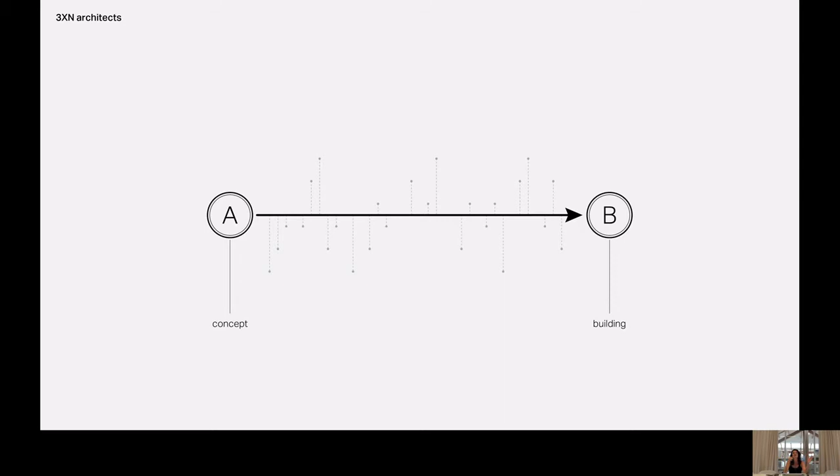I like this next set of slides because it says something about the different capacities and roles between 3XN and GXN. At 3XN Architects, essentially you start at A, you have a concept, you go through a process, and of course it's never exactly a straight line, but basically you end up at point B, the finished building. Hopefully A and B look pretty much the same. That's our aim, to keep it as clean and as faithful to the original idea as possible.

Whereas at GXN, it looks a little messier, a little more complicated. Essentially it's our role to test things, to explore, to mature ideas, maybe also to be disruptive in some ways. And we do this so that 3XN don't have to.

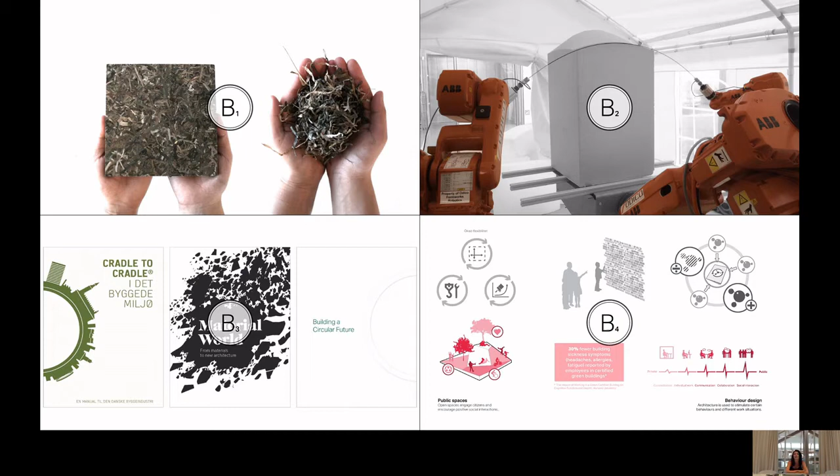In terms of output, it could be anything - we've worked on new materials, I'll come on to that too. It could be a new bit of code for robotics, it could be a book. We've published many books, which are all open source and available on our website. Or it could be design guidance, whether for a competition or later on in project development. So it's very varied.

Really, it's this synergistic, symbiotic relationship between the two of us. The research helps shape the practice, and then the research goes back and studies the results through post-occupancy evaluations, for example, learns new things, and so we keep feeding on. It's an evolving process, and it's really all about learning.

Within GXN, we have three key focus areas: behavioural design, circular design, and digital design. I'm not going to speak so much about digital design today - I'll talk about the other two. What's important to say here is that we see these as all essential components of sustainability. You'll see none of them say sustainability - it's because we've broken it down into constituent parts. I think often the real strength, the real juicy, interesting stuff, is in the overlaps between these different domains.

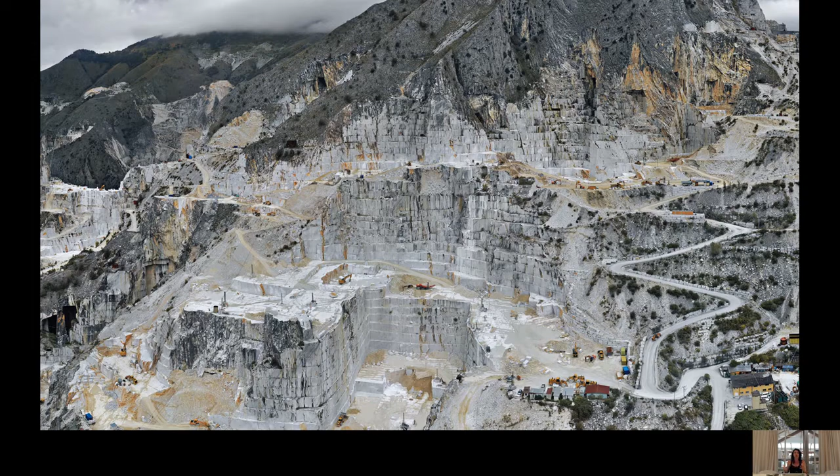So I'm going to start now on this first half, which is about circular design. Now, why are we doing this? We're really motivated by the impact of the built environment on the natural environment, the huge amounts of resources, the impact on nature and the landscape, and the need to conserve resources and be smart about that. These images kind of say it all.

I'm going to do something a little different. Usually I would just talk through various projects, but because this is about the city, I wanted to talk a little about scaling up knowledge - from the component to the city. So I'm going to start by showing you something at city scale, as more recent work, and then go back and show you how a few other smaller scale projects have fed into this and allowed for scalability.

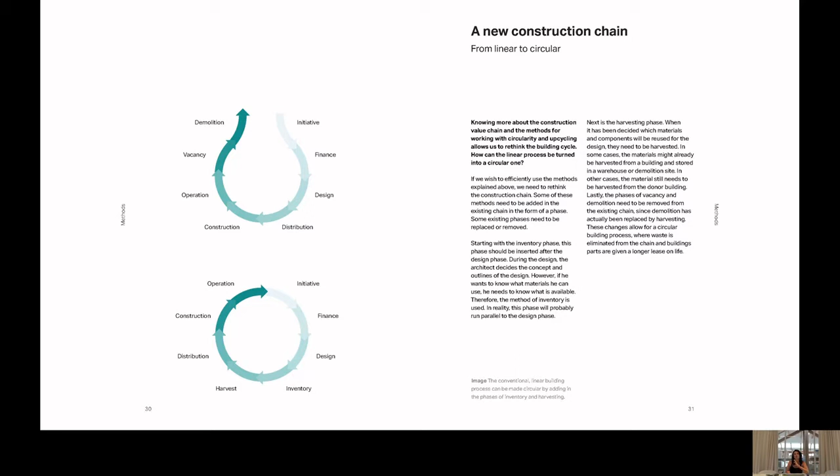So there was some sort of general literature review and understanding of this. And then we became as local and regional as possible. So who are the stakeholders here? How can we engage with them?

Things like at the beginning of a construction project, it's not traditional to get a demolition expert involved at all, but we understand that does become critical in circularity. So understanding, mapping out stakeholders, who needs to know what and when.

And then the students did a fantastic job of going out in the area. This is an area tagged for a huge redevelopment transformation. There were already buildings marked with green that are going to be demolished, and other buildings that are new and others that are retained.

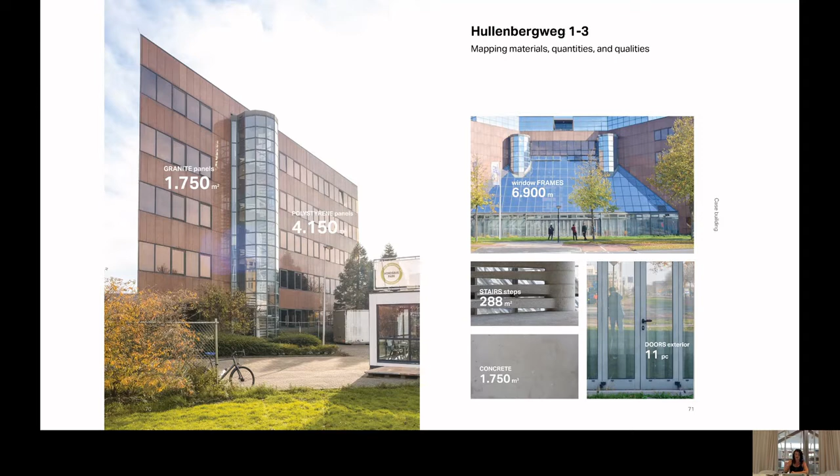So they went out looking at all the buildings that were to be torn down, to be demolished, and mapped and calculated the quantities and qualities of the materials available. This is a big exercise, I should say.

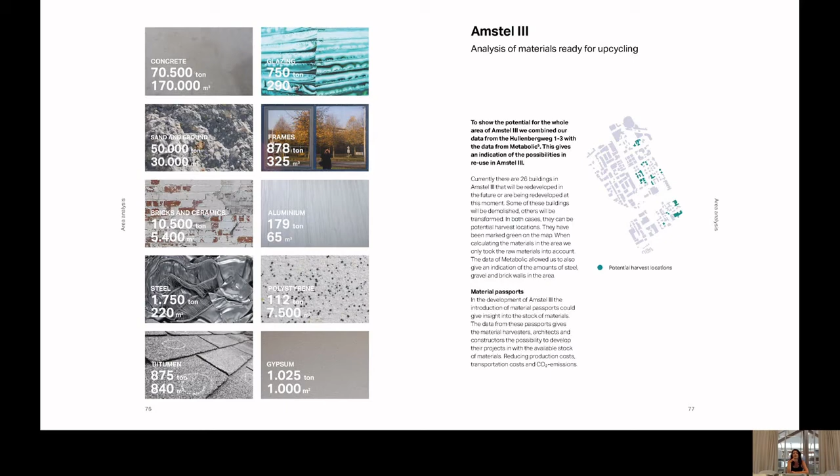This gives us a kind of palette that we can work with for the new buildings. You can see on this map the potential harvest locations and what we think we can get from these. We then carried out an analysis of what that means in terms of energy, and calculated that we could have 28% embodied energy savings through upcycling, so we can feed this material back into the new buildings.

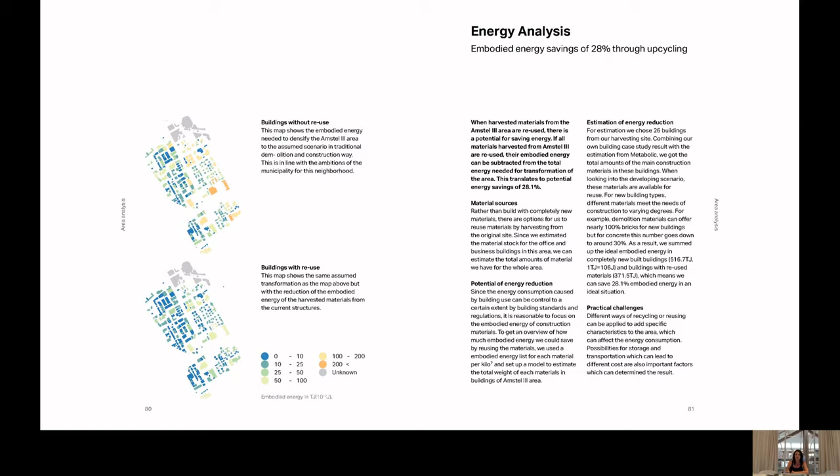So that was the preparatory exercise. And then we made the second book, Upcycle Amstel, about tools. This, if you like, is what the city wanted from us: how could we formalise a process, a method for ensuring circularity?

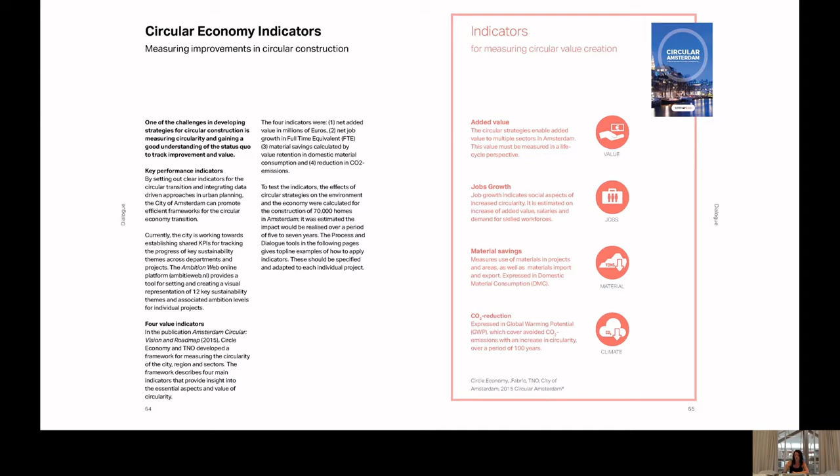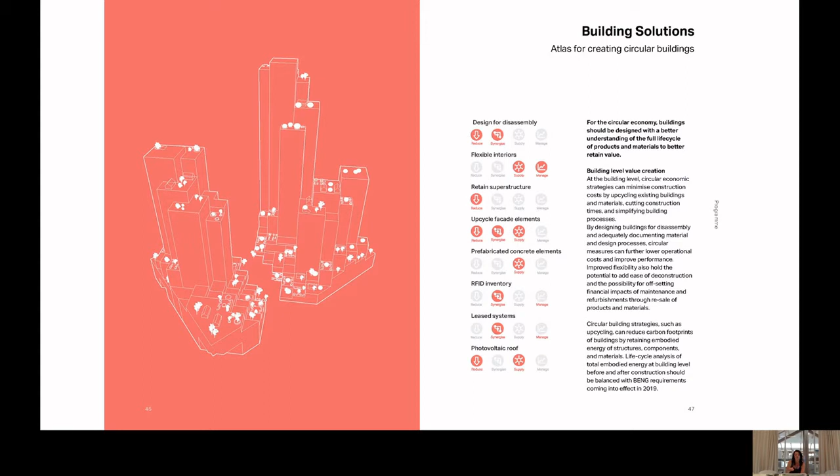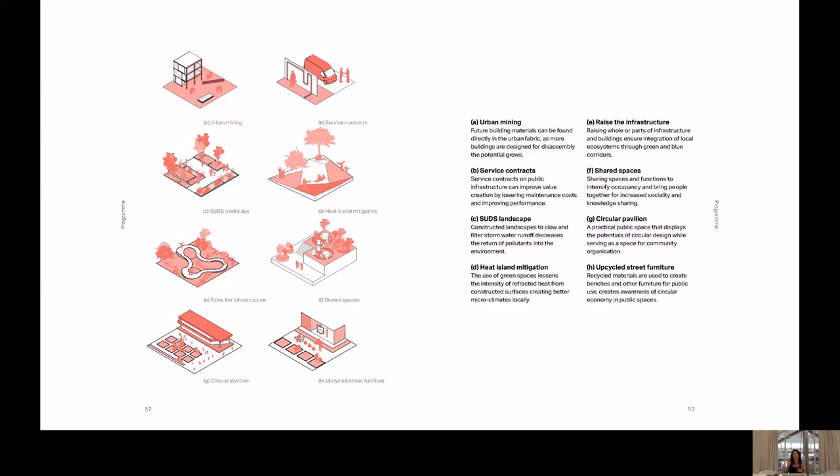And then we spatialized them in a diagrammatic, open-ended, non-deterministic way. We always find this communication aspect of the work really important, so people can begin to understand what it might mean, what it might feel like. It's not to be underestimated, that spatializing.

Then we looked at dialogue tools. Both this slide, and in general looking at the whole process, is about saying who needs to talk when, what decisions need to be made when. So almost like you would with a RIBA Plan of Work, plot onto that in terms of circularity the key milestones. Okay, so that was a more recent project, very much at a city scale, a very high level, and all about a sort of how-to manual.

But we have some form for other how-to manuals in the field of circularity in previous years. I'm going to quickly go through these. So Cradle to Cradle was one of the first that we did, and this was about taking Cradle to Cradle principles and reinterpreting them, tailoring them to both the construction industry and more specifically the Danish construction industry.

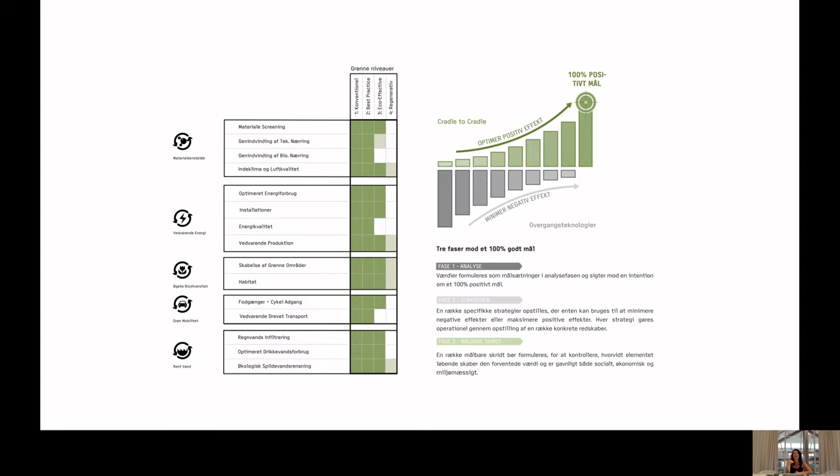And this book, again, was also very pragmatic, was also a sort of how-to manual, if you like. So we split it into different areas - I realise a lot of this is in Danish, but apologies for that. It could be about biodiversity, we had a chapter on energy, a chapter on water, and so forth, really laying out in each of those what you do at each phase, what are the strategies, and how can you measure this.

What we learned from that book, we also put into practice through projects which become case studies as well in the framework of research.

Some of the cradle principles, as you might know already, but the idea is you want to separate biological materials and technical materials. When they get mixed together, you might call them Frankenstein materials. They're very different, they're impossible to recycle, let alone upcycle. So you want to keep these separate.

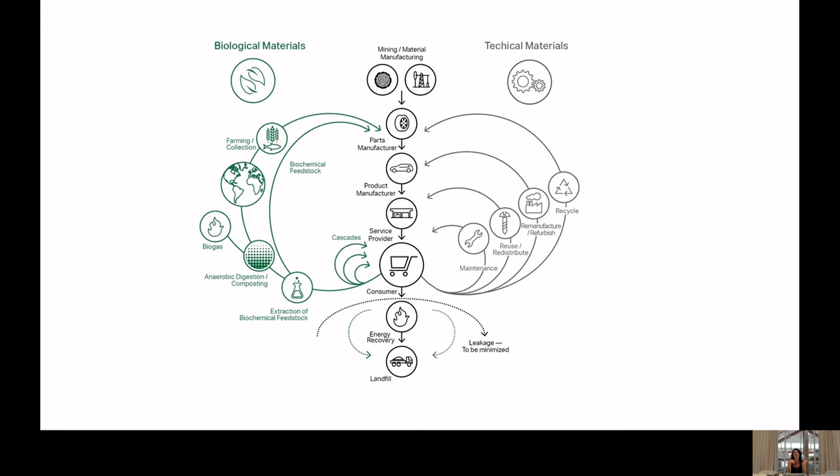So this project then all became about biological materials. How could those be transformed into building components? So there's the tomato stems, the raw product, and then we also looked at other materials, for example seaweed, and then looked at how these could be processed and turned into panel or sheet materials. Many of them have really beautiful textural qualities as well, and this could be an alternative to, for example, gypsum plasterboard.

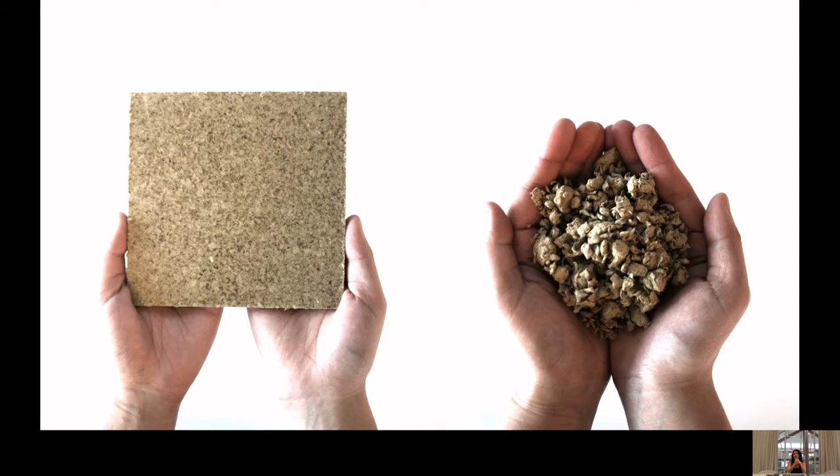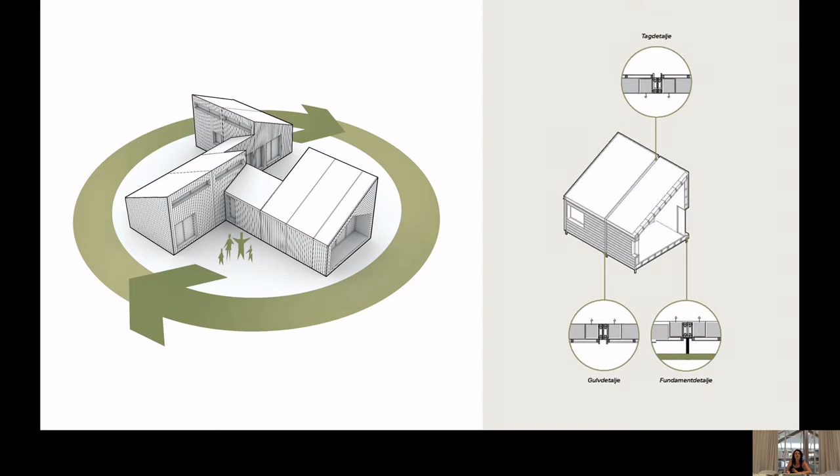You know, it's not just about the components themselves, but what about on a systemic level if we're talking about housing? This was really one of our first forays into design for disassembly, because we studied how the housing itself could be very modular, and therefore could be like a kit of parts that could be put together in different ways to create different sorts of housing for different and changing family types. I think it was this, so that was a sort of scaling up from the material or component, starting looking at system.

So with this next book, Building a Circular Future, we took that further.

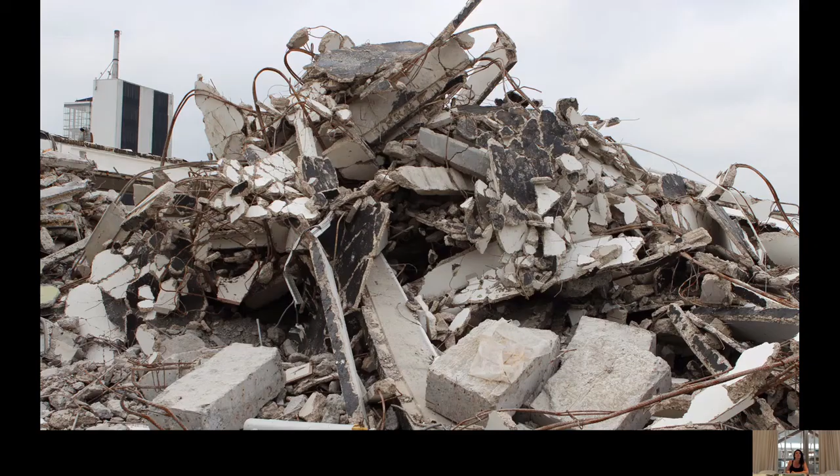89% is the percentage of construction material that is currently recycled in Denmark, I think anyway, which sounds fantastic and is great. The problem is, though, that this is what it looks like. So even though 89% is recycled, only 2% of the original value is retained. This is clearly problematic economically, also as an incentive for sustainability. So we set out to really examine this idea that it's about value, not volume. In other words, it's about upcycling rather than recycling or even downcycling.

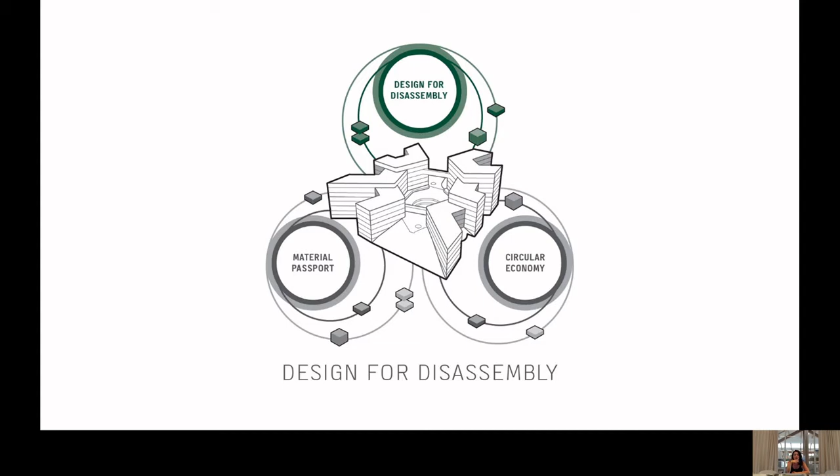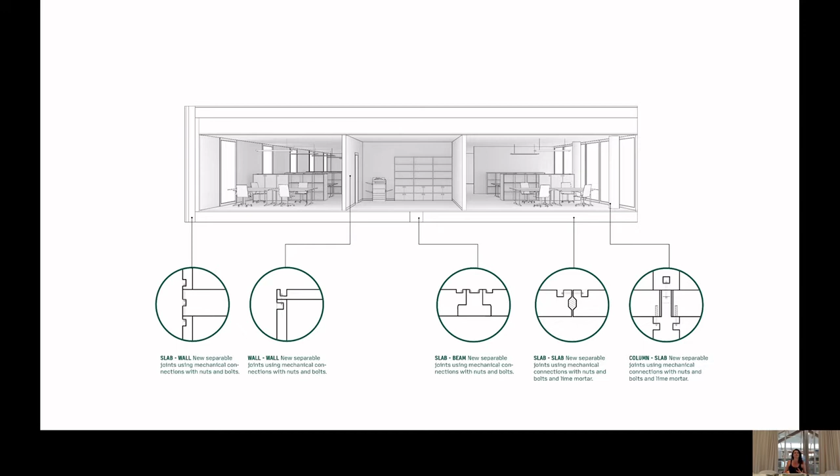So we then analysed all the different sort of typical intersections - slab to beam, slab to slab, column to slab, etc. - within a typical building, and collaborated. I should say here actually that basically all of our projects are collaborative, we always work with partners. So in this, for example, we have a long-term relationship with Peikko, manufacturer of concrete and steel, to develop these mechanical reversible fixings. You can see here, these are embedded very neatly into the prefab concrete slabs or walls, whatever it might be, so that these at the end of their life can be cleanly and easily taken away and reduce wet trades, which also, by the way, helps with program.

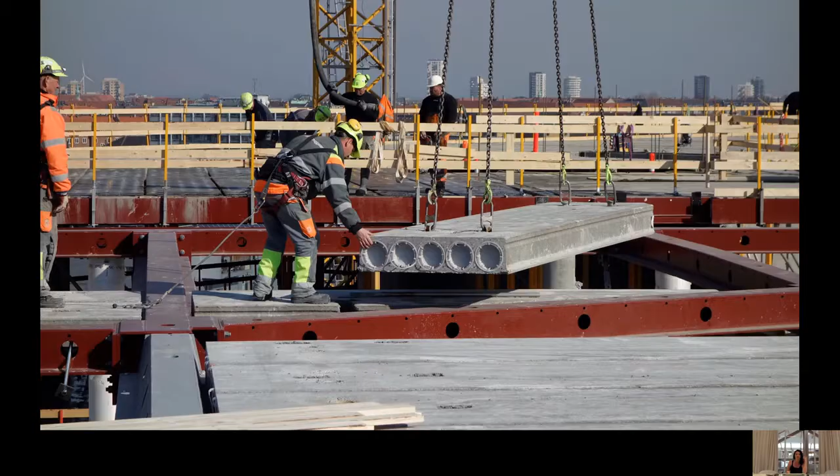I suppose the idea here is that if you were to walk onto a building site and see this site, you wouldn't know if this was construction or demounting. You can't tell if it's at the beginning or the end of life, which is true of circularity. So that's a collaboration very much there with a manufacturer.

So how can we put these principles into practice? I've got a project here to show you called Circle House. Now this is a huge project. I could talk just about this for the whole lecture, but in a quick way, this is hugely collaborative.

The idea with the Circle House is to revolutionize Danish, what you might call social housing - low cost housing made for everybody. The goal is to create housing which costs just the same to build and to buy or to rent as traditional, so that the circularity, apart from the original design and research cost, it costs the same in practice.

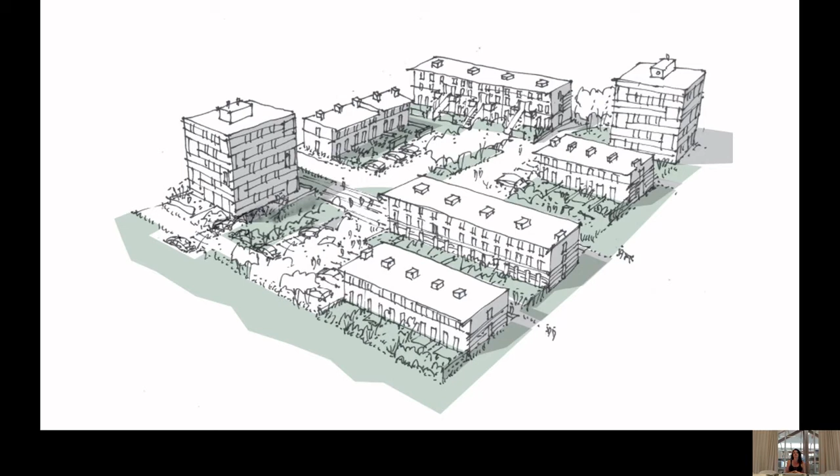And so with this, we're looking at circularity and design for disassembly at all levels from the building, from foundation up through beams, slabs, walls, and so on - so the whole thing can be taken apart in the future.

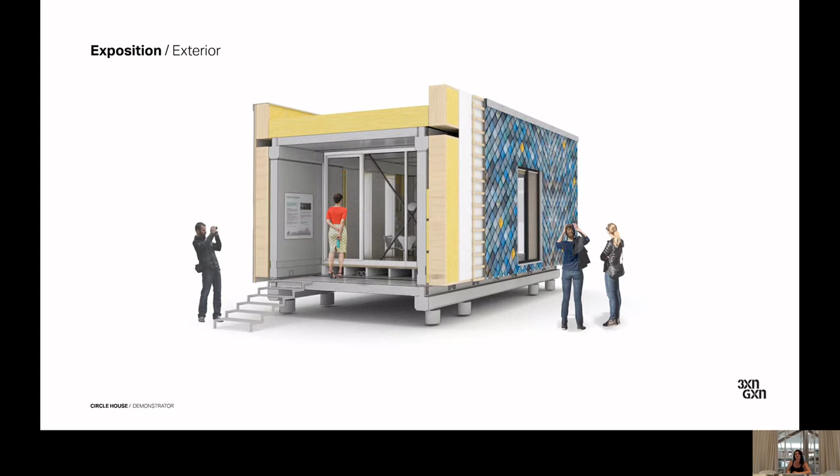So one of the things that we did there was to build a demonstrator. The idea with this was, of course, to test out some of these ideas in a technical way, but also very much to promote the idea. It's not only about the technicalities of construction, it's also about the aesthetics of upcycling, the aesthetics of disassembly.

For example, the furniture is also upcycled. You can see the different sorts of insulation, which come from natural materials, and so on. This is sitting in Copenhagen, I should say.

You can see on the left there, it's quite pedagogical as well, about explaining the different layers of the building and their expected differing life cycles, how it could be taken apart.

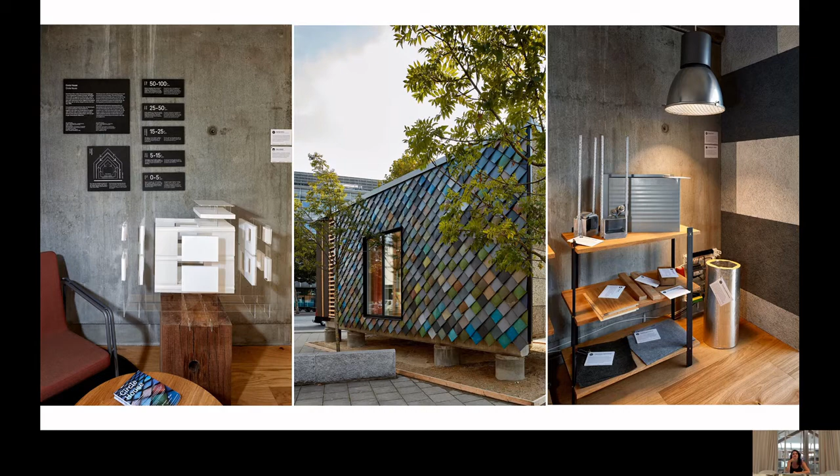So the final one in this circularity section, we take particularly the notion of design for disassembly further and apply it to a different scale, different typology, to ask what if an office tower could keep evolving. And this is important, it's a changing market with changing tenants in many of these spaces. So how can circularity also start to add value to the users of the building?

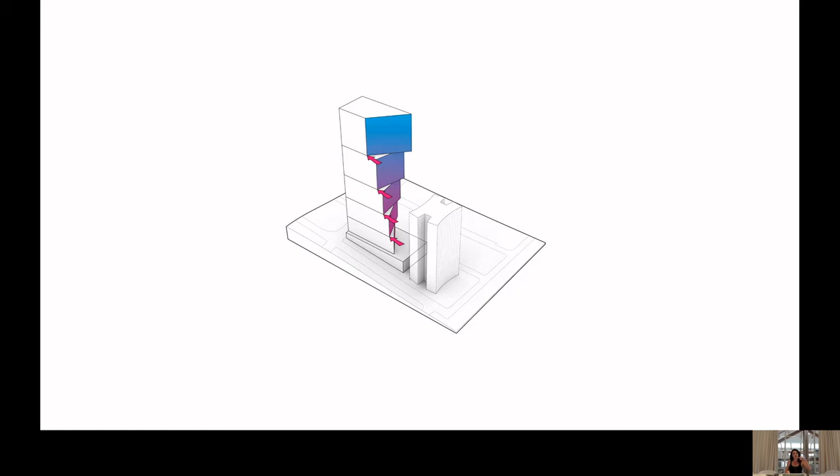We also then broke down the volume, so it's not just an extruded mass. This is because the idea of human scale, a human scale tower, was really important to us. So sort of taking this idea of the city scale, but then stacking it, sort of carpet city if you like, and then stacking that up into the tower.

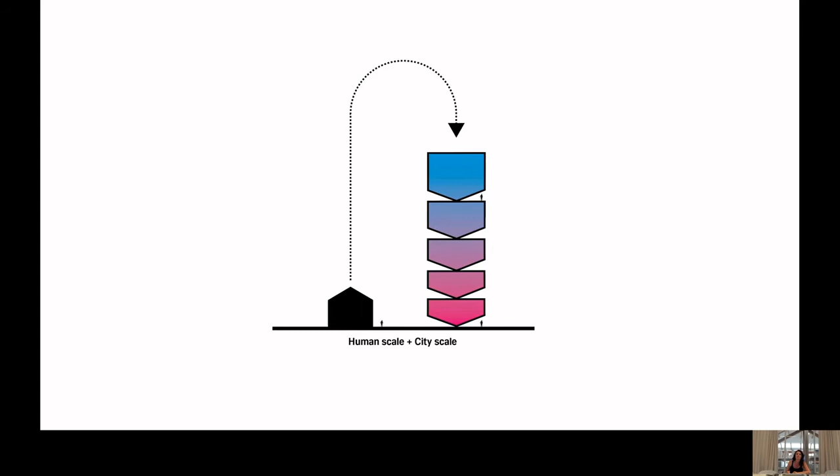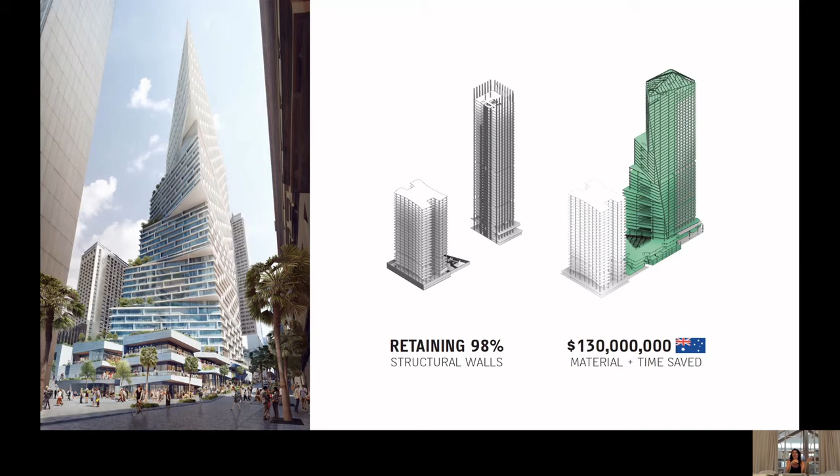So I mentioned before, it's actually a refurbishment. You can see on the left diagram there, we retained 98% of the structural walls. And then we added in the green this kind of overcoat on top of that to increase the floor area and also transform it aesthetically. We calculated that this would save 130 million Australian dollars, both in material and in time saved programmatically on site.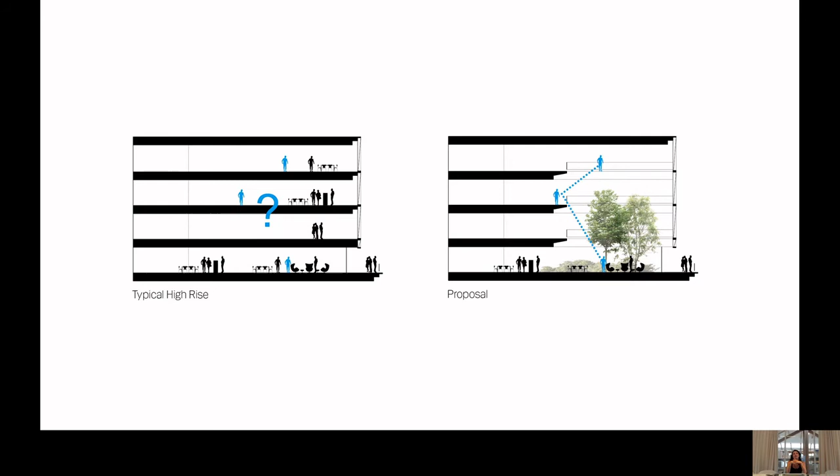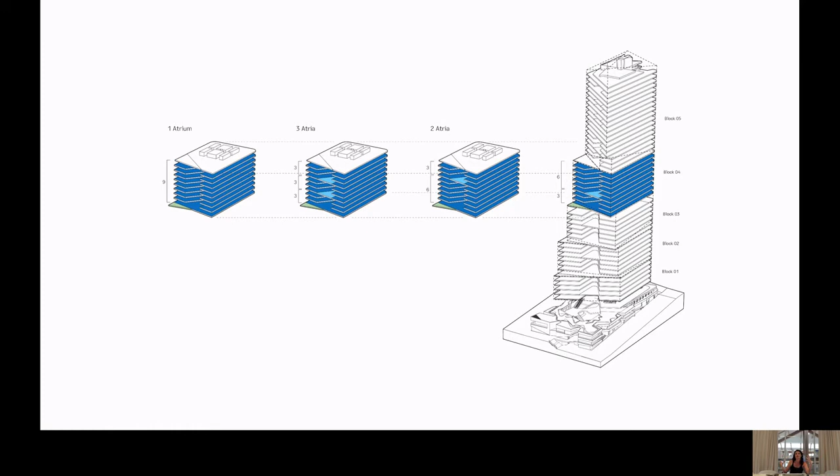So the design for disassembly component was born out of this idea. It's a speculative office development. We don't know how many tenants there are going to be and what their wishes are. Usually we'd be proposing, on the right-hand side there, some fantastic triple height spaces and atrium, but maybe some tenants don't want that. So how could we afford that flexibility? So that one can choose when you move in — if you're a tenant, yes, I want a 2-story high atrium, or we've grown and desperately need more floor space, let's fill it back in again.

So what we looked at was taking out this little U-shaped cut at the front of the building, and using design for disassembly principles — reversible joints, no wet trades, and so on — in order to make this piece removable, as a soft spot effectively.

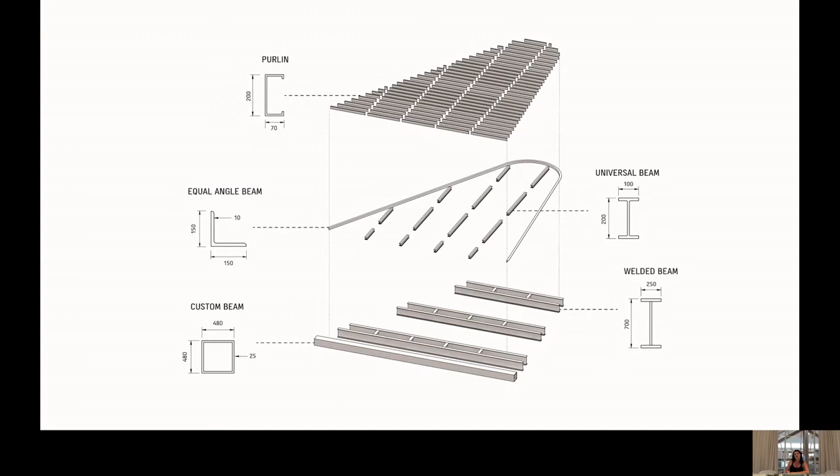A couple of things here: we use completely standard steel sections, nothing bespoke. They're spliced together, mechanically affixed rather than welded, and most importantly, they're sized in a way that fits in the goods lift in the building. This is important so that if a new atrium is added or taken away, the building doesn't have to shut down. We don't have to close parts of the building — it can keep on working and living while this happens.

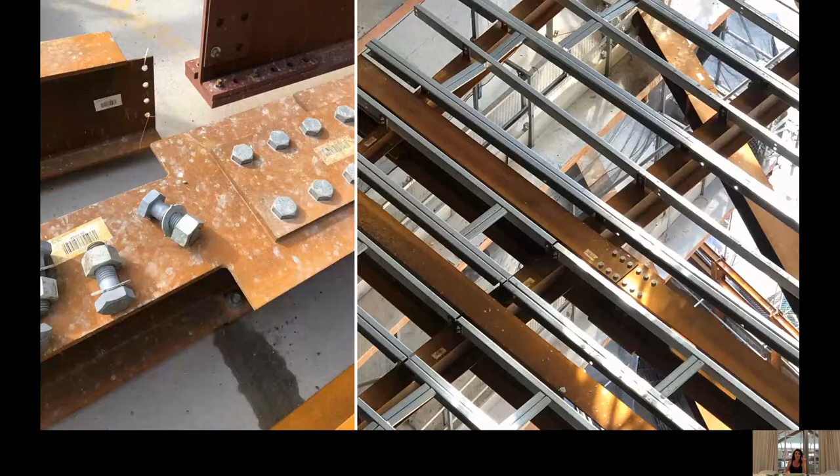And this is actually on site now, this is the very building I was just talking about. We really believe in the power of these spaces in workplace design, in schools and anywhere, and the power of design in terms of well-being. So this is kind of the pivot point, if you like, between circularity and behavioural design — one of those overlaps I mentioned at the beginning, in the Venn diagram of those two fields. So I'm now going to shift into behavioural design.

I think I'm okay for time — just checking. So behavioural design is a newer focus area for us.

This is 3XN's tagline, architecture shapes behaviour. They've been working with that for as long as 3XN have existed. But as the years have gone by, they've really sharpened up that focus and articulated it even more. It's a very Scandinavian idea, I suppose. But at GXN, we flipped that 180 degrees to say that behaviour shapes architecture, or at least it absolutely should and ought to.

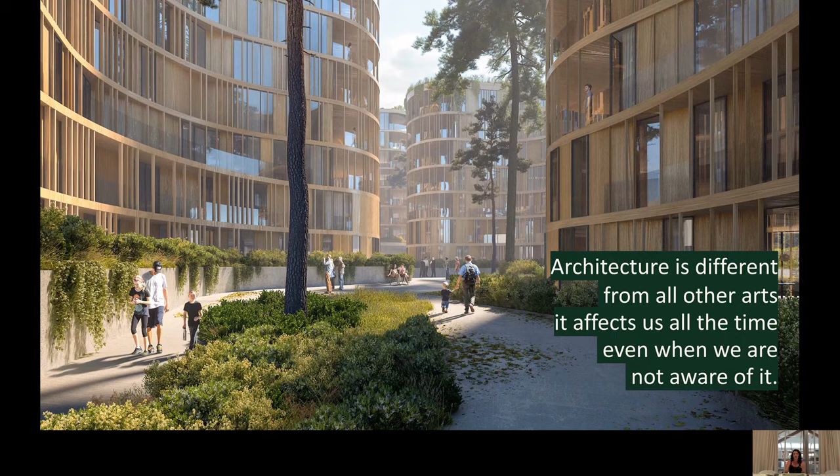I want to speak a little about why behaviour, why behavioural design, is important. One thing we often say is that whether you're aware of it or not, whether you're conscious of it, the built environment is always affecting you — affecting your physical, mental, and emotional health. So if you're a designer, an architect, whether you acknowledge it or not, you are a behavioural designer. We just try to be explicit and conscious of it.

There are some amazing facts out there. The social sciences have traditionally been harder to quantify, but across various disciplines, amazing research is coming out these years. For example, research says that your face-to-face relationships — your weak social relationships, not with family or friends, but your community — are the number one indicator of longevity, even more than alcohol or exercise. Homes set in a really lush green courtyard report drastically reduced amounts of crime, including domestic violence. And daylight, something architects are always keen to work with, markedly increases sales profits in retail units, even more than energy savings can do.

So again, I mentioned the economy, which you'll notice I do quite a lot. It's because we really have this holistic approach to sustainability, where you've got the environmental, ecological, of course the social, and also the economical.

So I guess what I'm trying to say here is that behavioural design is essential to sustainable design. And that's because we believe that if people don't feel good in places, if people don't want to stay there, if they don't want to look after them, if they don't grow to treasure them in terms of their identity and sense of place, they're not truly sustainable.

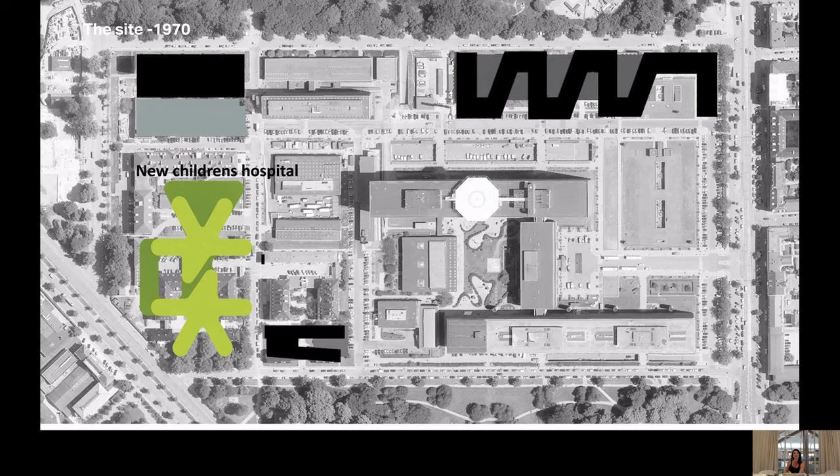And I want to show you how some of these have come to life in our children's hospital here in Copenhagen. This is the site, and we've done a few other projects there shown in black for the hospital, which is the biggest in Denmark, I think. But this particular project is the children's hospital.

Good, no music, I'm glad about that. So here's some of the basic design concepts. It was conceived of as 2 hands because there were quite different functionalities to house, with some overlap between them, but they needed separation.

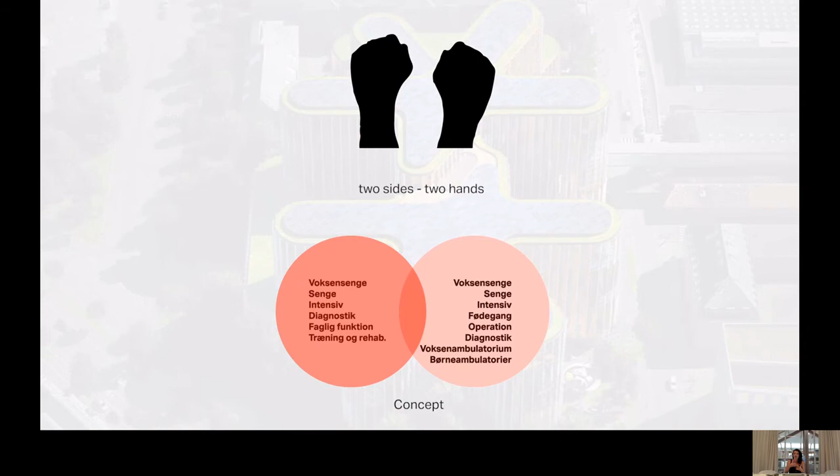And then imagining extending these hands out to create these fingers with terraces at the end of all of them. I'll talk more about why as we go through here.

So this is a children's hospital. It's a really vulnerable group of not just the children, but their families. And we felt it's so important to design for their well-being.

So we had these 5 principles that really are the foundation that the design was built upon: integrated play, designed for everyday life, see me ask me let me, the good journey, and clear zones. I'm going to go through each of these, how they relate to wellness, but more specifically how they were

translated into design ideas. Starting with play, first of all, this bit here was in collaboration with Rosan Bosch, other architects here in Denmark. We looked together into different benchmarks, different types of play and why it's important - for example, the emotional side or the cognitive or the physical. And then you can see these icons in the middle, created as a palette of what we needed to cover.

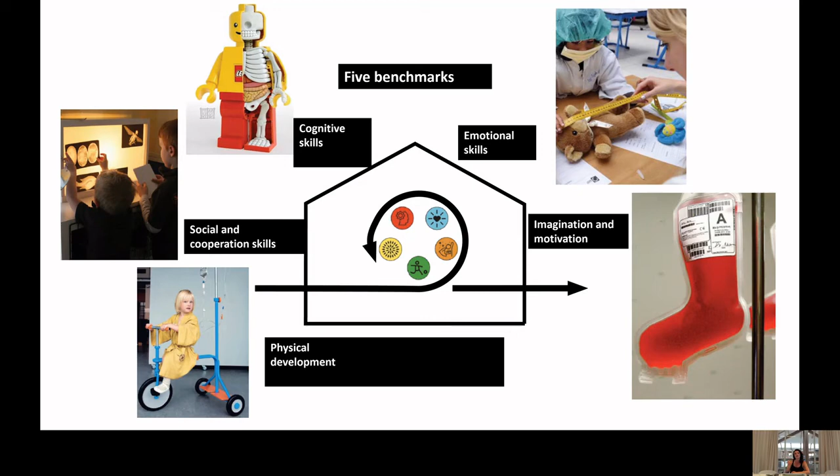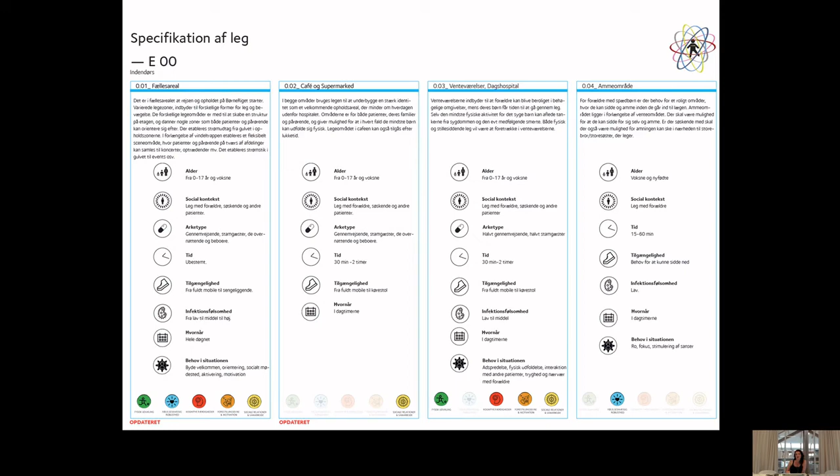Once we had the specification, we then made it spatial - looking at, for example, in the entrance areas, how that might differ to something which is deeper into more private areas, different sorts of play that are relevant there.

Design for everyday life was this very simple idea of domesticating the hospital. There's children here that are here for really long periods of time, and their family are staying with them or sometimes coming and going. So how could we design the hospital as home? By doing that, we really took this idea of a classic house and how it has different levels of privacy - as you move deeper in, you kind of get the heart of the house, which is very social, and then more private areas and buffer zones and so on.

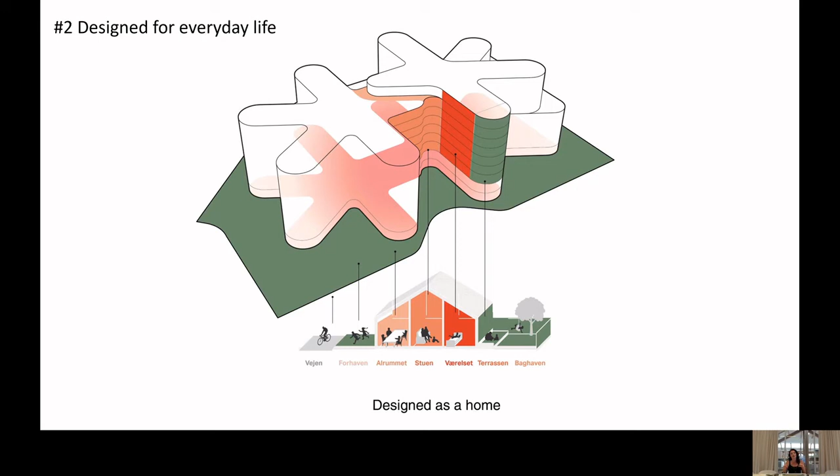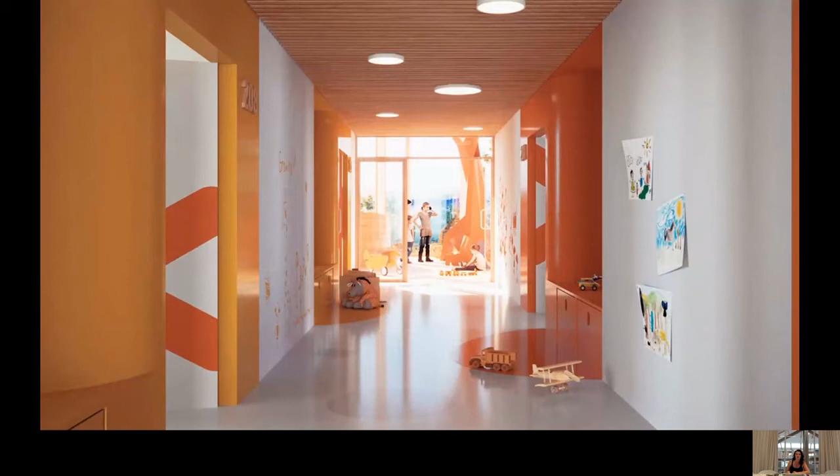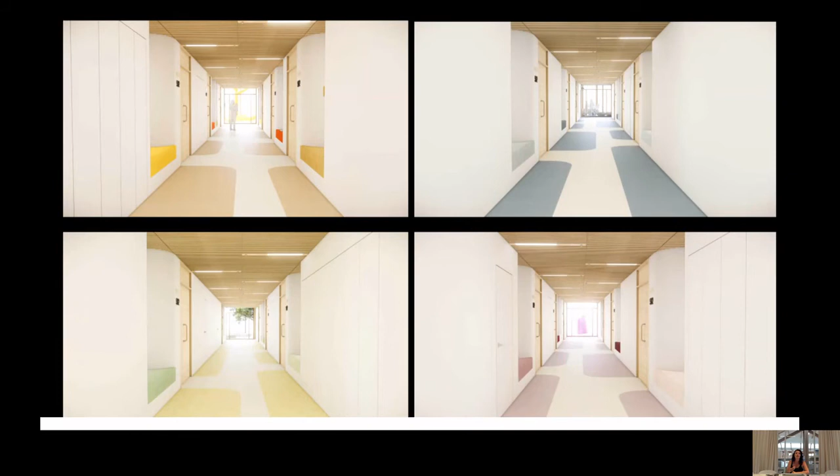We also then looked at things like color. Now, this is not what it looks like, because this was an early idea, and I think we started thinking bright, cheerful colors. But then we looked more into color theory and actually the importance of colors which soothe, which are gentle. We believed that to be really critical, so the color palette as well was part of the design.

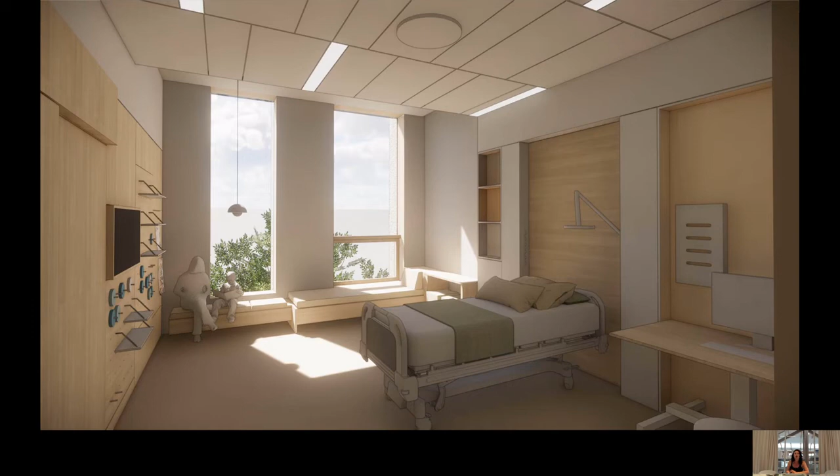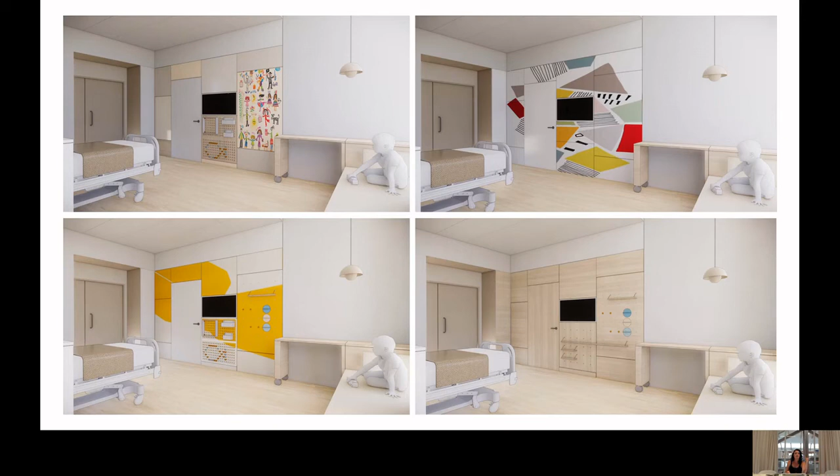In the rooms themselves, of course, ample daylight, views, different sorts of surfaces for sitting or lying and so on. Also the materiality here, we've got a natural material in these walls, and they're customizable. The idea is that children can have some influence on their room, just as you would at home - put drawings up or whatever - so they could have options over what sort of style they want, so that they felt they had some control back in their life, as well as creating a more domestic style atmosphere.

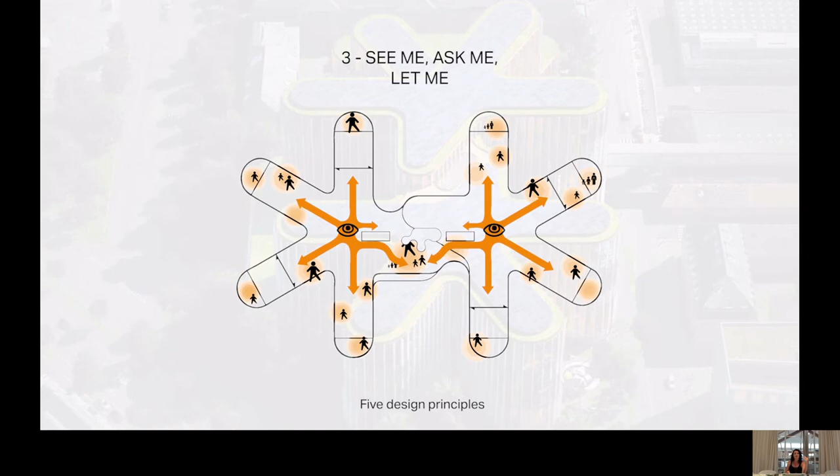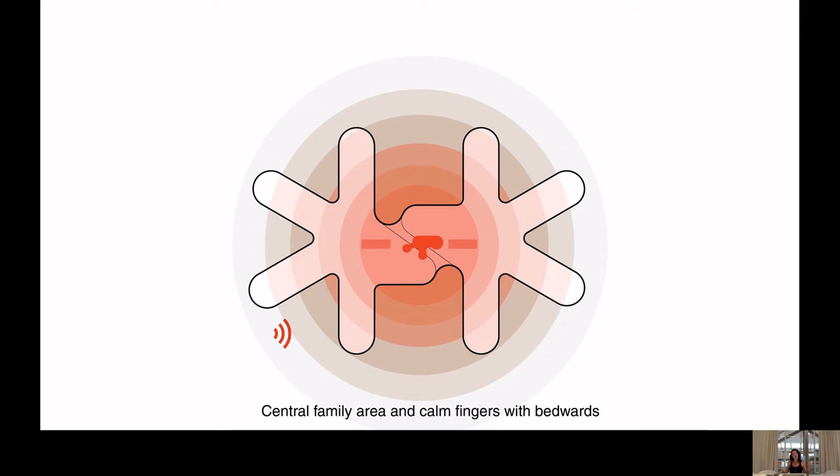See me, ask me, let me. Here, at the eyes that you see, this is where the nursing stations are. The idea is that everyone is equidistant from these nursing stations, so everything is easily accessible. This also helps with noise, with acoustics - so that in the middle it's more like the living room, it's noisier, it's social, you can go there. And as you move further out along these fingers, it becomes more quiet and calm and private.

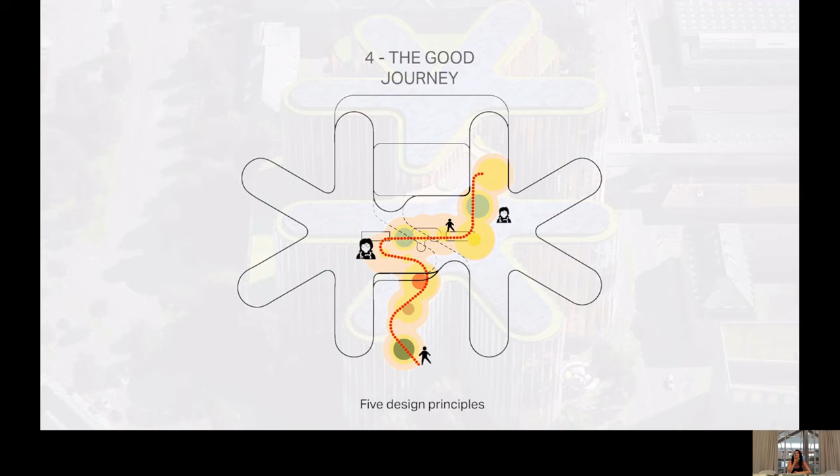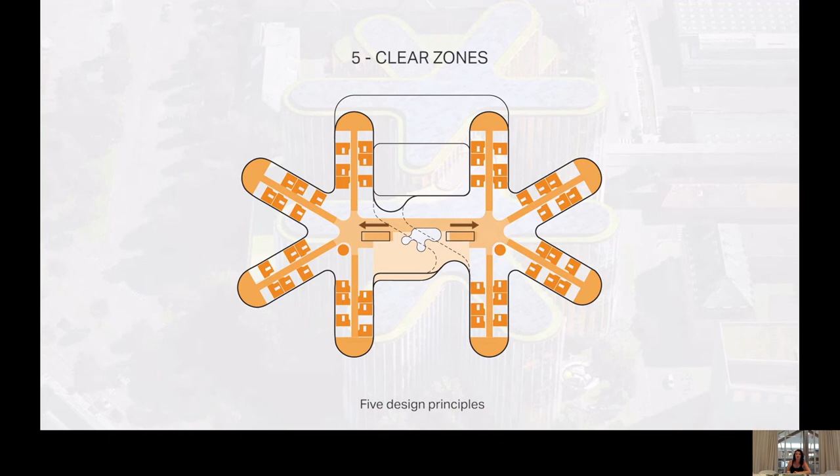The good journey, I think what's most important here is that because of these fingers, this cul-de-sac design, so often in hospitals you can feel like your bed's in a bit of a corridor with constant traffic through, people and things going back and forth. But here with these cul-de-sacs, it means it feels more private. So you have this journey from the approach of the building up through the more social spaces, but then only the people living or working in each of these fingers is there. It's not a corridor, it's not circulation. And then finally, very simply, clear zones, just the clarity of where things are and how to find your way back. Hospitals can often feel like mazes as well.

So here's a plan. This project's on site, I should say. But you can see here at the end of each of the fingers, there's a kind of fingernail, which is a terrace or a garden.

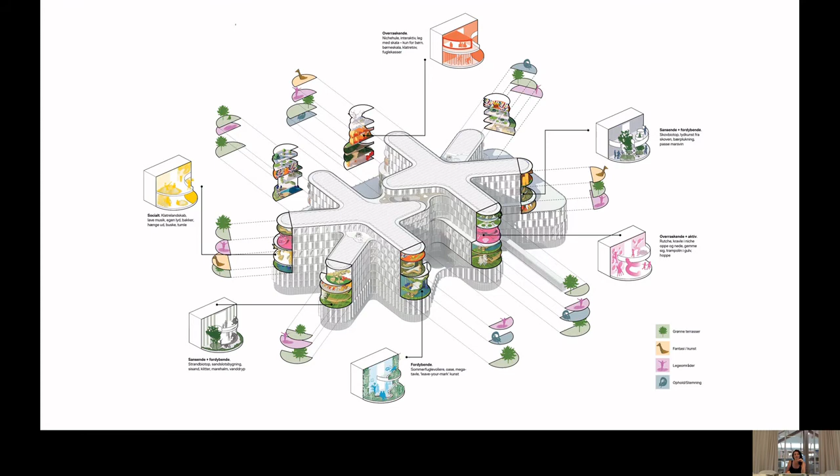So these are some general principles that we use, and I think this project's a really great example of it. We looked at each of these fingers on every level having its own outdoor space, which could be themed differently depending on orientation and what kind of wards were there, but really integrating that fully. But then also on the abstract side, a number of things here - these beautiful sinuous curves, and also the tactility of the material, the level of scale in the natural materials as well.

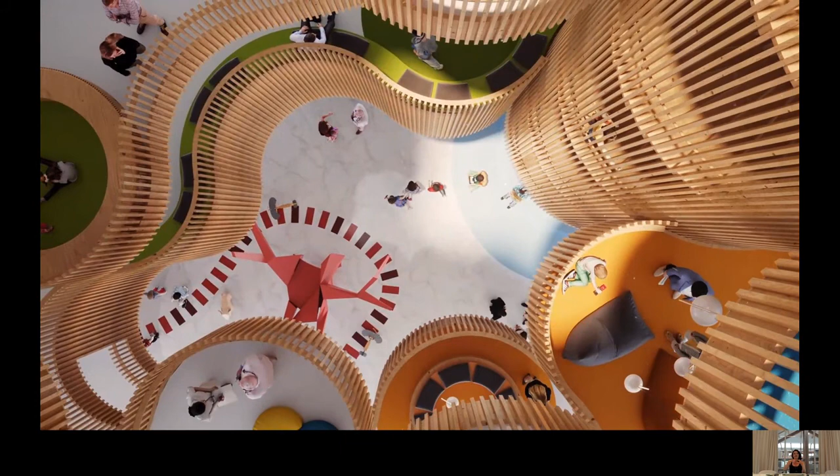And so you get these really fantastic overlapping terraces. It almost feels like being in a tree house or something like that. And this is the finished building - that's also on site, it's nearly finished actually. So in not too long I will have proper photographs of it.

So social structure - I think I better speed up a little bit here for time. Social structure, good social relations - what that means depends purely on the project. It's different for every project.

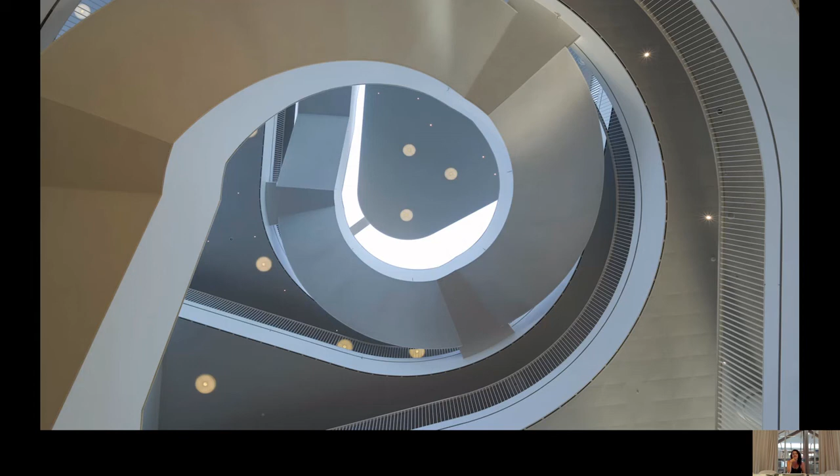And what I want to talk about here are stairs. We have a real love of stairs, like an obsession with stairs at 3XN and GXN, because we believe they can be incredibly important in terms of promoting social interactions. We actually had Mila, a psychologist who wrote a PhD with us, all about staircases in large-scale atriums, just like this - this is our UN City building in Copenhagen.

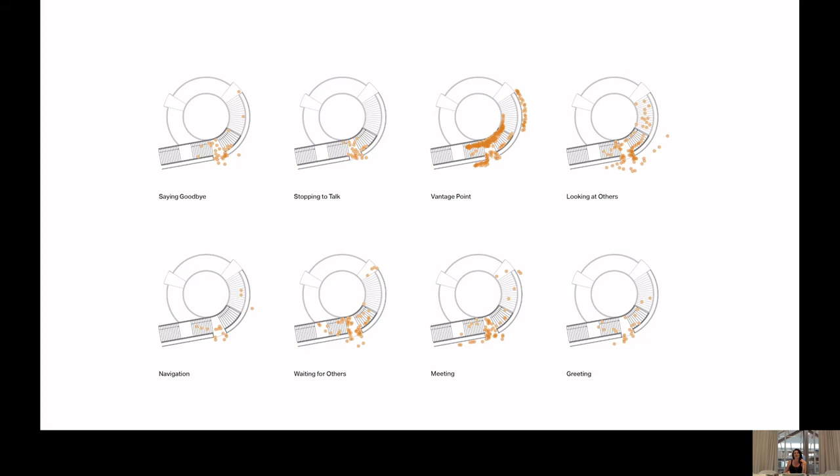So she studied how many people were there, at what times, and what were they doing, importantly. And what we learned from this is the importance of landings. More than the actual treads of the stair themselves, the landings and the space around the balustrade, that is where people meet together. That's where you feel comfortable to stop and wait for someone. You can people watch. It has many benefits.

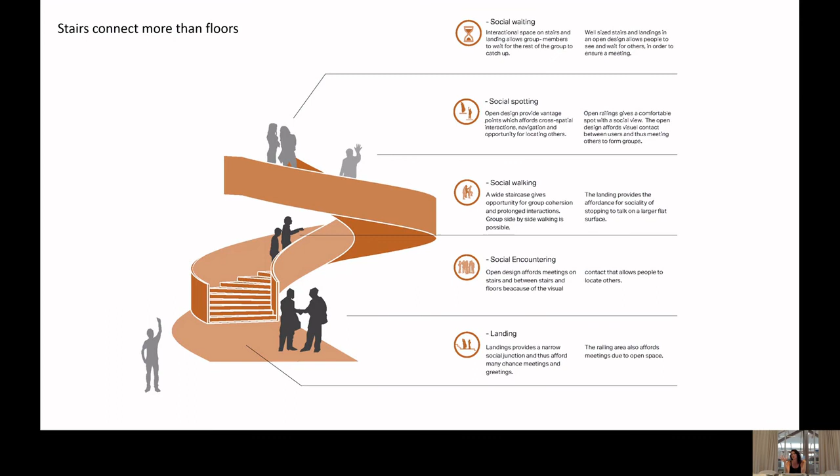And so here you can see they're saying the stairs connect more than floors. They connect people just as much, and they facilitate all sorts of social encounters, walking together socially, looking out, and so on. So again, I use this slide to say this is where we've learned something that we have built, and then we feed it back into the next project.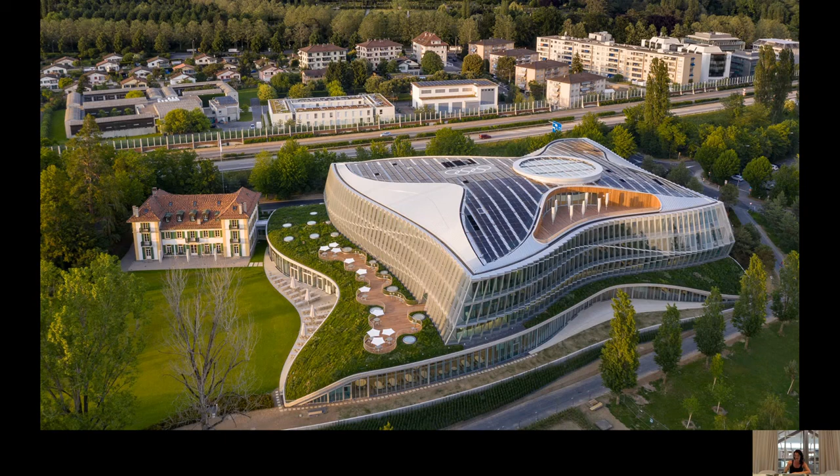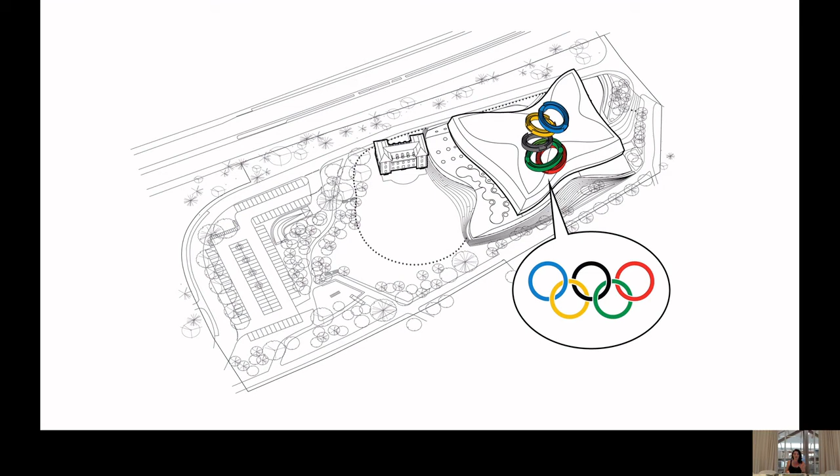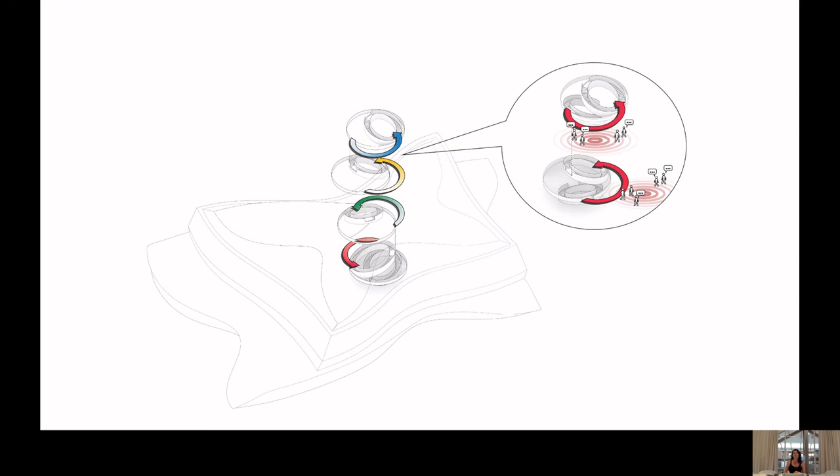The stair has this very unique design. It's based on the idea of the 5 Olympic rings, these being stacked and angled throughout the building. So it has this strong symbolic function. But we also wanted it to be a bit more than circulation. So we took this learning about the importance of landings and these kind of in-between, interstitial spaces around the stair, and really put them on steroids, blew that up to be something much bigger, so that this was also a space in its own right.

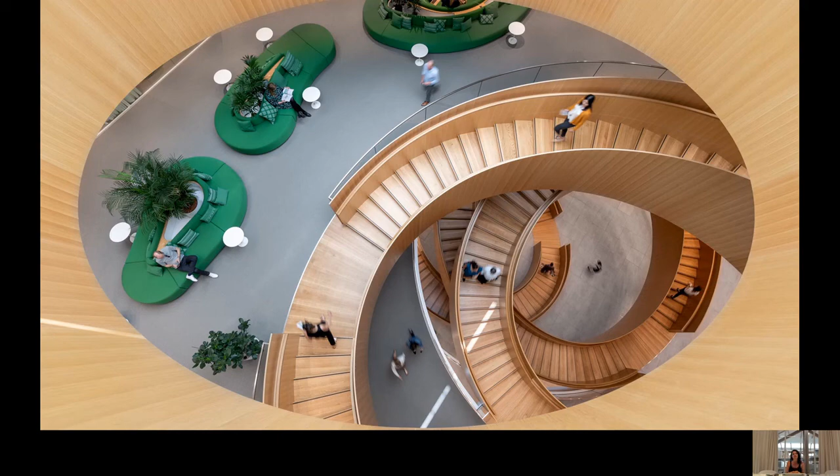So you can see here on the stair you have to walk all the way or halfway around to go up to the next level. So these spaces, which otherwise could have been just circulation or dead space, become almost like lounges or meeting areas in their own right. You can see this is one of the circles and then the next one above, so to go up you have to walk around again. In a sense, it's saying that circulation is not only about efficiency, it's about effect as well.

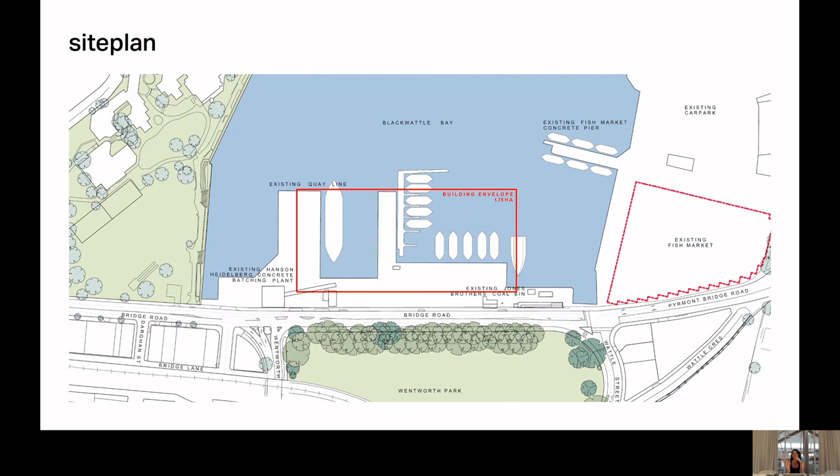There you can see - well, I can't point, so it's a little difficult, but maybe next, here you go. So on the right there's the existing, and here's the new. And you can see some of the reasons why we had to work quite hard to make this part of the cultural experience of Sydney and part of this promenade, this walk all the way around. Because the site is on a very busy road, Bridge Road. There's a park on the other side where it's really disconnected, and it's one of the few areas where there isn't this sense of really making the most of the waterfront.

So what is a fish market today? It's the fishing side, of course. You've got boats and fishermen coming in one side, and then everyone else, whether you're a consumer or an industry, coming in the other. And what we wanted to do was really expand and open up that idea of what it can be, so that it becomes a public anchor, so that it becomes a cultural space.

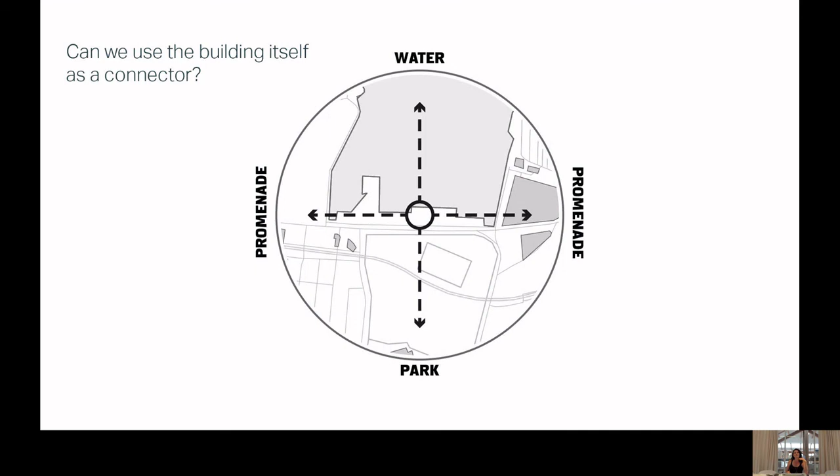And so we retain the authenticity and the industry of the fish market, but we bring that together with other experiences. So it kind of opens up, it becomes more extroverted. And so the building, rather than being a barrier, this becomes a connector, connecting along the promenade and from water to park.

Some of the issues we had there that we had to find creative ways around: on one hand you've got these big vehicles, trucks and ships, and on the other hand you've got people. We want people to come there on foot. So how do you work and bridge between these two scales in a way that's safe? And how do you do this in a way where you can retain the authenticity of the fish market and that it still works?

It's not just sort of Disneyfied, but at the same time attractive to people. So what we looked at, this is just one example, is how the promenade and the roof, which are the two key elements of this building, can rise and fall to meet each other. We call this staging, so that we would raise people up on foot here and have all of the industrial actions below. This almost becomes like a stage set where this is the audience and you can watch this happening, you're safe, there's no problem with the transport and infrastructure.

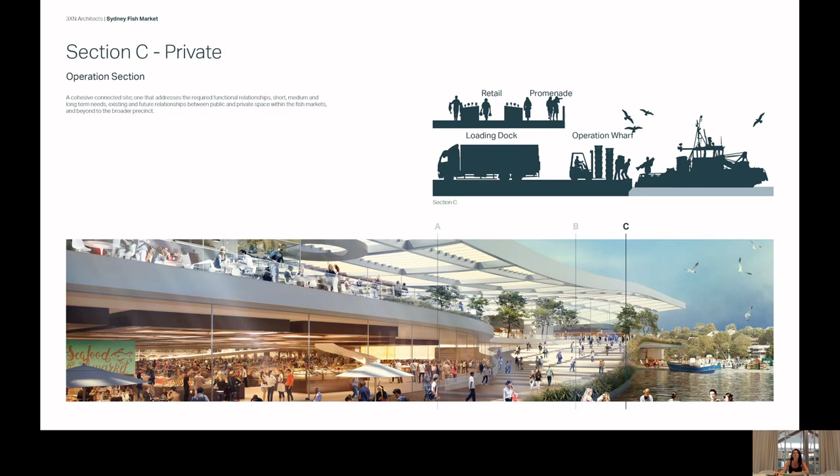You can see here down in this section, that's what we do. We lifted up areas so boats can come in and pull the roof down there, so that these are two different levels which can see each other whilst still having some independence.

And we also then looked at how we can blend these different functions. So this is looking at short-term adaptation. How can the auction hall, which is this amazing, loud, fantastic place where the fish is auctioned off every day, but that happens very early in the morning?

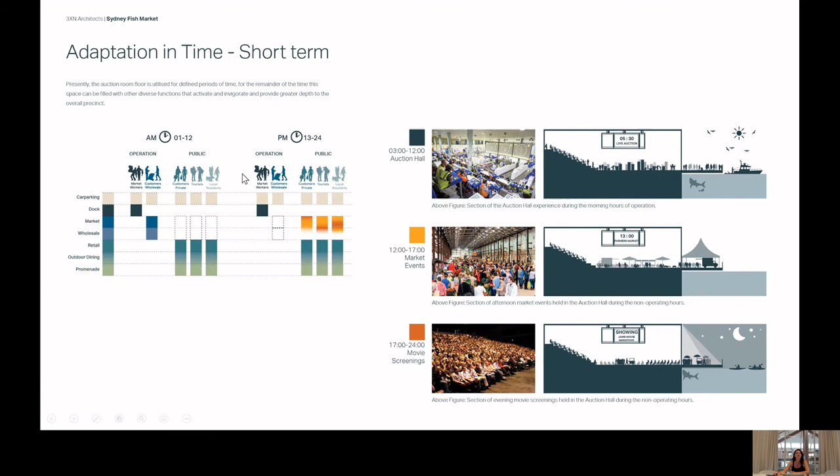So how can this have other meaning, other identity and use at different times of day? Designing that in a way that can be used for, for example, markets, farmers markets, fish markets, or how it can be a cinema or theatre in the evening. So again, bringing in culture is so important to get different groups of people, different users, understanding their different needs and really weaving and braiding these together.

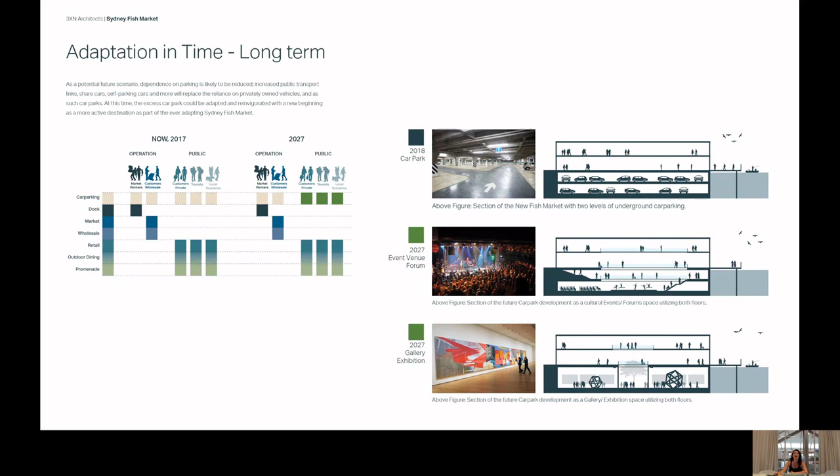And then doing the same thing at long term. So at the moment there's quite ample car parking, but thinking how could we make the most of the space for the city as well as the fish market longer term, if we, as hoped, start phasing out the amount of cars that we use. So again, how could this be created, cutting holes in the slabs there so you can get this fantastic space for events or a gallery or whatever that might be, sports space.

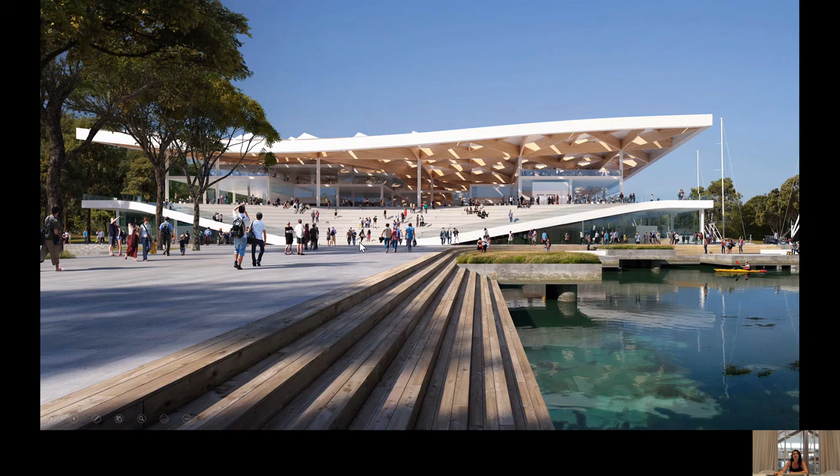And here you can see some renders of it. So as I say, the roof is this waving function that covers everything, though there's a lot we could talk about there. But really the promenade here and all of the urban landscape is working really hard to bring these functions together. You can see here as it swoops down, creating this kind of amphitheatre type space and a new public space for the city.

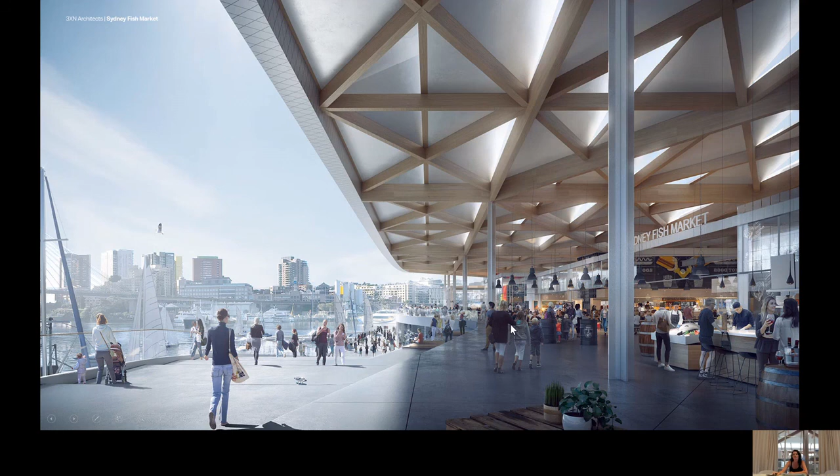And on the other side here, you can see where ships and lorries and so forth can come in, while safely people can continue that loop without being broken. At different times of day, within here there's all sorts of eating experiences and markets.

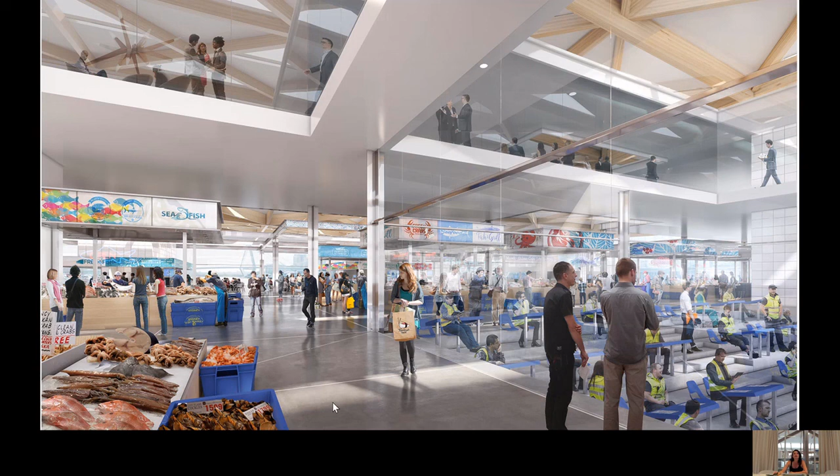And again, I mentioned this word authenticity. So whilst you're in here shopping or eating or having a meeting in an event space, whatever that might be, you can see this auction space. Here are the fishermen, here are the tradesmen in this space bidding for the fish. So it brings these worlds together and creates a bridge between them culturally.

That is what I wanted to talk to you about today. And I've loosely titled this about being behaviourally driven and materially bound, which is something we often say here at GXN, that we need to be holistic in how we approach sustainability. And that's true whether you're talking about a small pavilion or a whole region or city. Thank you very much.